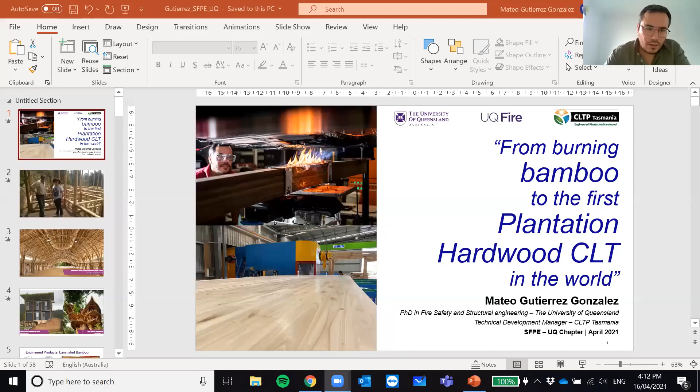Thanks, Julian, and good afternoon everyone. I'm very pleased to be here this afternoon. It's a pleasure to give a talk in the SFPE UQ chapter. Not very far ago, I was sitting on the other side, looking at other alumni and practitioners in our field. It's a great opportunity, and I'm very happy to be here today. I'm going to start sharing my screen, and we can start with the presentation. Can you see the screen, Julian? Yeah, that's perfect, you're good to go.

The title of my presentation is 'From Burning Bamboo to the First Commercial Plantation Hardwood CLT in the World.' As you can infer from the title, I will divide my presentation into two main parts. The first will focus on the latest outcomes of my PhD, which was on the fire performance of bamboo structures. In the second part, I'll give you a glimpse of the work I'm currently doing at CLTP Tasmania, where we are developing a sustainable approach for processing plantation hardwood into engineered wood products, mainly glulam and CLT.

Let's get started. This journey began in 2010 when I started my master's in structural engineering in Colombia. I decided I didn't want to study conventional materials like concrete and steel. I wanted to focus on alternative, more sustainable materials. So I started studying bamboo, and back in 2015 I decided I wanted to do my PhD, and I really wanted to do it in bamboo, after doing research and practicing in designing bamboo houses.

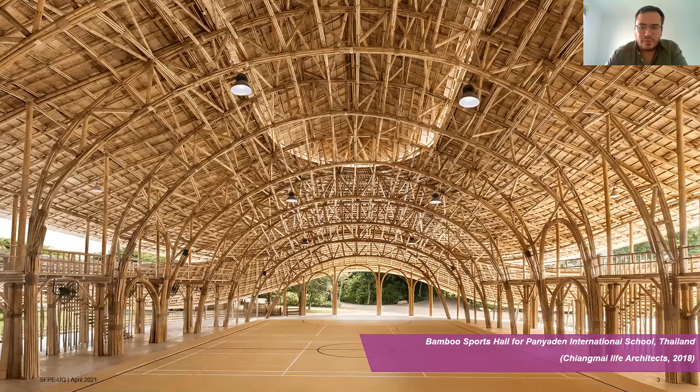For many of you, bamboo is not a familiar construction material. It's not very used in Australia, but it's a very common material around the world — more than 1 billion people live in bamboo houses. Bamboo is mainly used in low-rise construction, like residential dwellings or community centers, or like this sports hall located in Thailand.

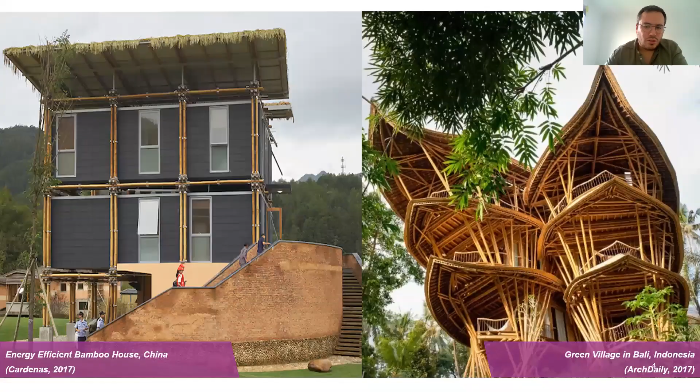But bamboo can also be used in multi-story houses, like 3 or 4 story buildings. You see a couple of examples here — this is a house in China. On the left-hand side you see a house in China, and on the right-hand side a hotel in Bali, showing the application of round bamboo.

We don't only use round bamboo as a construction material; similar to timber, bamboo has also evolved into engineered products. The most common engineered bamboo product is laminated bamboo, made of bamboo strips. You have round bamboo that is split, and the strips obtained from the bamboo culm are planed, glued, and pressed together to create larger cross sections. This is a laminated bamboo beam made out of Phyllostachys pubescens, the most common bamboo species in China and the most common species used for manufacturing engineered bamboo products.

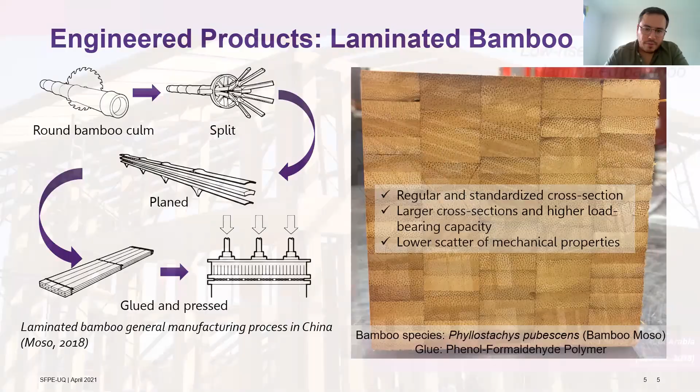With engineered bamboo, you can move from irregular circular cross sections, like those in round bamboo, to regular, standardized rectangular cross sections that can be larger — and because they're larger, they can withstand higher loads. As with any other engineered product, you reduce the variation in mechanical properties, resulting in more reliable and stronger load-bearing elements. There are applications for laminated bamboo similar to those seen in mass timber construction or light timber framing.

When I started my PhD and moved to UQ, our fire safety engineering group focused on the fire performance of materials and understanding fire performance in the built environment. So we decided to conduct research on the fire performance of bamboo. Of course, bamboo, like any other combustible material, faces the same issues when subjected to fire - it burns and loses integrity, which can lead to the collapse of bamboo structures.

On the left-hand side, this is a house in Mexico. They were welding some steel connections, and that led to a fire. Here's another structure in Bali - this was one of the main engineered bamboo manufacturers in Bali. You can see this concrete column, and this is what was left after the fire.

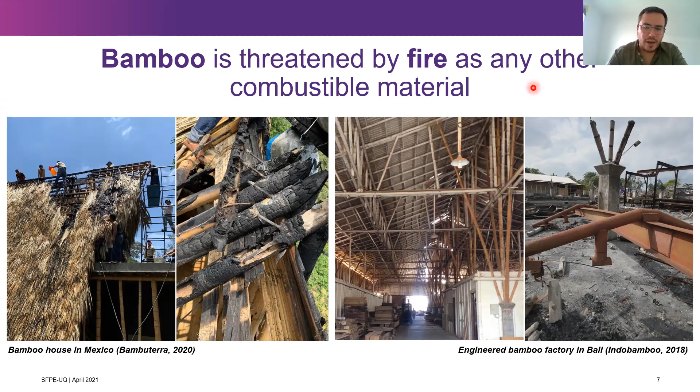Round bamboo, because of its geometry and mechanical properties, can lose its strength very quickly, which can lead to structural collapse.

This is another sad example - the biggest engineered bamboo supplier in Europe. This is the factory of MOSO International in the Netherlands. As you can see in the picture below, the adjacent building where they used to store all the engineered bamboo products got burned and collapsed after burnout.

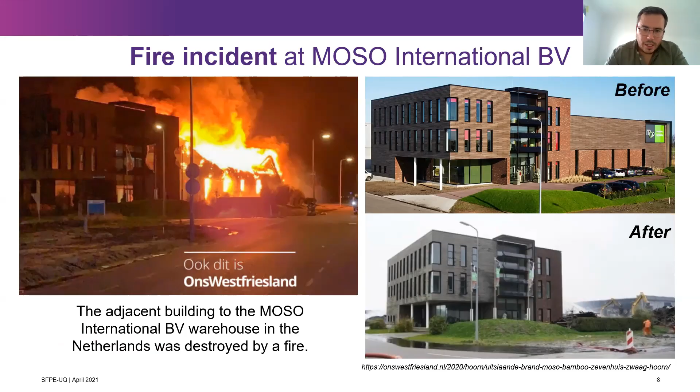We found there was very little understanding of how bamboo behaves during a fire. Obviously, because more than a billion people live in bamboo houses, bamboo is already being used, so there's already a hazard if we don't know how to design bamboo to withstand fire. There's also potential for using bamboo in mid-rise or even high-rise construction.

Future applications for laminated bamboo can be used in mid-rise and high-rise constructions where fire could be a significant problem. So we believed we needed a methodology to facilitate performance-based design solutions with bamboo, and we wanted the same confidence we have in other conventional materials. To do that, we require a better understanding of the structural fire performance of bamboo.

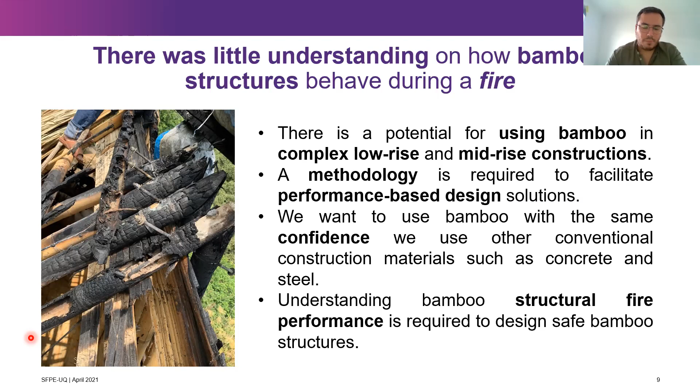The methodology we propose can be divided into three main stages. The first part focused on understanding the mechanical properties at elevated temperature - compressive strength, tensile strength, and modulus of elasticity for both types of loads. We looked at failure modes and tried to create stress-strain constitutive models at elevated temperature.

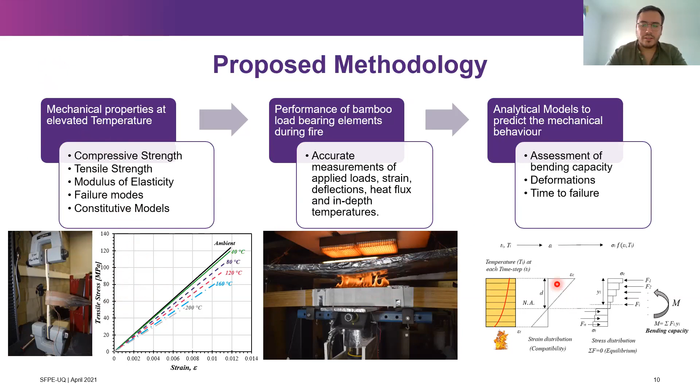With the information at the material level, we moved to a bigger scale to predict and understand the performance of load-bearing elements - mainly columns, short columns, and bamboo beams. I'll show results today about the beams. Finally, we wanted to create analytical models to predict the performance of those members - using the mechanical properties, their variation, the constitutive models, and experimental test results at a bigger scale, to see if the models could predict that behavior.

So we started testing laminated bamboo in compression. We did the first tests in round bamboo, but quickly realized round bamboo loses strength very quickly. Since during fire conditions we definitely wanted bigger cross sections, we decided to put more attention into engineered bamboo products.

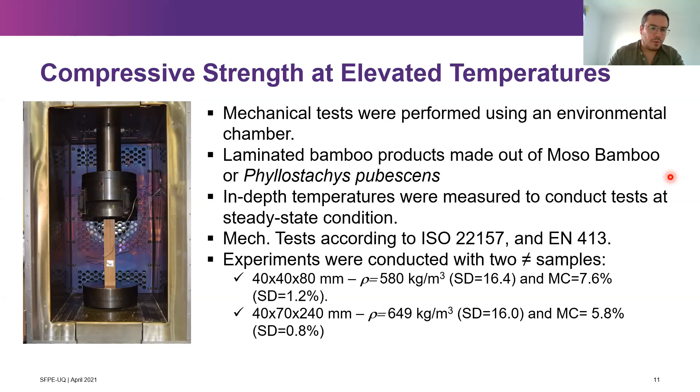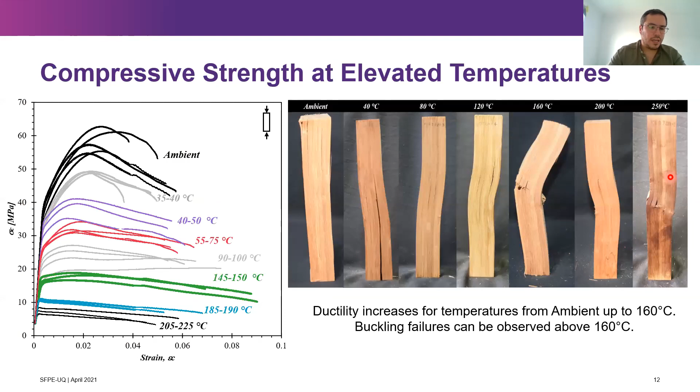We exposed laminated bamboo specimens in an environmental chamber where we could carefully control the temperature. We established correlations between surface temperature and internal temperature of our specimens, and we were able to understand the reduction in compressive strength. We also measured the reduction in modulus of elasticity and tried to recreate the stress-strain behavior of bamboo under compression.

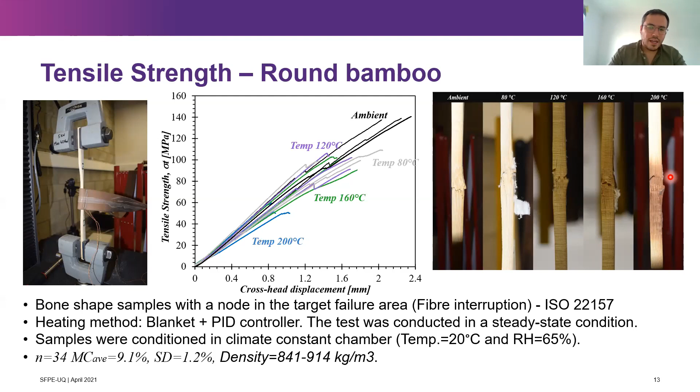We repeated the same process with tensile strength, conducting several tests at different temperatures, from ambient temperature around 20-25 degrees up to 200-250 degrees. Again, we measured the reduction in modulus of elasticity and the reduction in tensile strength.

We performed dynamic mechanical analysis, DMA, on small-scale samples, and compared the results of the dynamic mechanical analysis against the results at the bench scale. What you can see here is the reduction - the normalized modulus of elasticity against temperature.

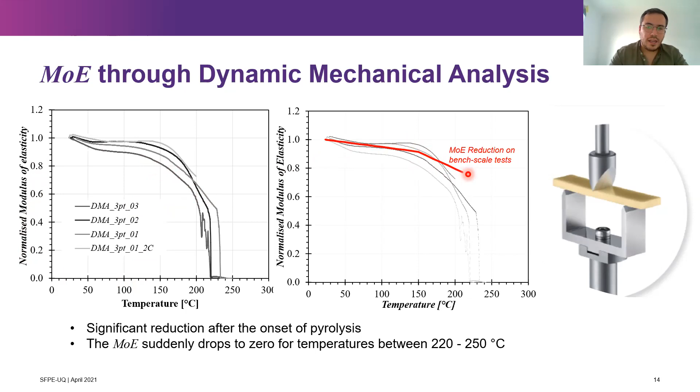And these are the results of the DMA, and this is the reduction in the MOE at bench scale, which told us that the results match pretty well, both medium and small scale.

With all that information, we created some reduction factors for bamboo at elevated temperature. Reduction factors for the compressive strength, which is the black line here, reduction factor for the tensile strength, which is this line, and then the reduction in the modulus of elasticity.

What you can see here is that, for example, at 100 degrees, bamboo loses almost 70% of the compressive strength, and that's a significant reduction. If we think that the temperature during a fire is around 1200 degrees Celsius, this is telling us that we very quickly start losing the capacity of load-bearing bamboo members.

So the reduction in tension is not that critical, and a reduction in the modulus of elasticity again is not that critical. But after 150 degrees, where we observe the onset of pyrolysis, the reduction is way more considerable. Then after 250, the material is completely charred, and the strength and stiffness of bamboo can be neglected.

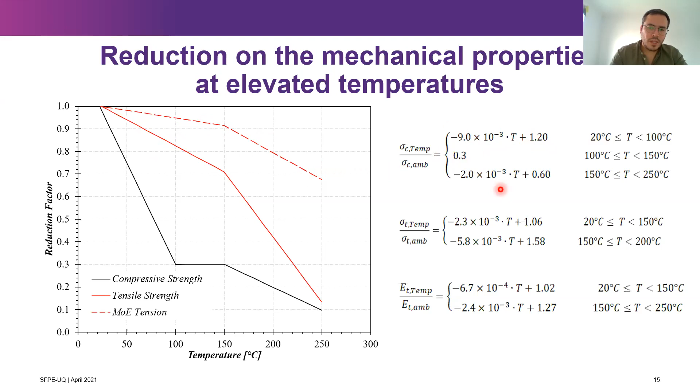We describe that reduction with these equations, and based on that reduction and our stress strain models, we propose stress strain models for compression and a stress strain model for tension. Tension is a little bit easier because bamboo is pretty much elastic in tension, and it has a brittle failure.

Compression is a little bit more complicated because you see a lot of plasticity. You can use very complicated models, but we ended up going for a simplistic approach to see if that simplistic approach could give us an accurate result. So we proposed to use a perfect elastoplastic model that was changing as a function of temperature.

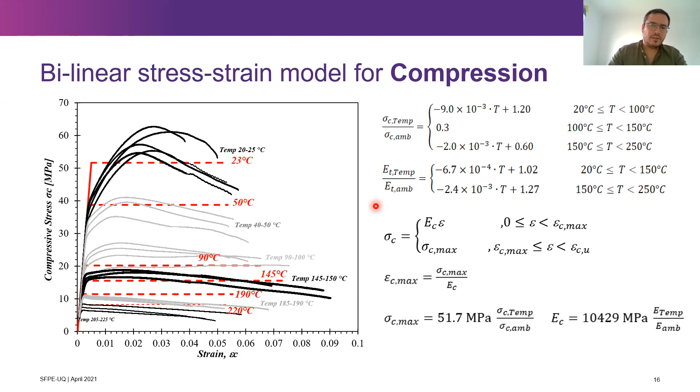Again, we describe the performance of bamboo with different equations, which were a function of temperature. Then with these constitutive stress strain models, we moved to the next stage, which was the analysis of bending specimens exposed to fire.

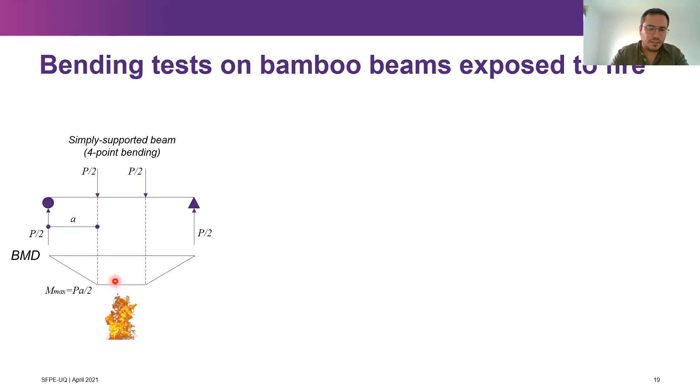In order to test those elements, we decided to go for the simplest scenario, a simply supported beam loaded in 4-point bending. You obviously have the maximum bending moment in the central third of the beam, and we expose that part to fire. But conducting fire experiments is not an easy task.

We couldn't carry out those experiments at the structural lab because of the release of smoke and because of the elevated temperatures during the test. We were also creating some risk for the equipment.

So we designed our own testing setup, and that was one of the biggest tasks of my PhD, designing this setup. Basically, what we did is we turned this upside down — instead of applying the loads downwards, we applied the loads upwards.

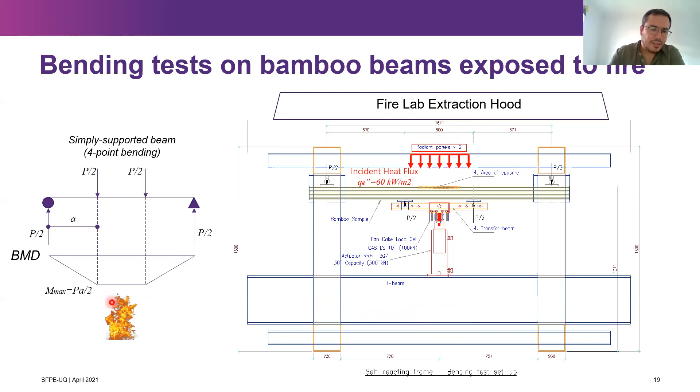So supports are here, you have your specimen here, and then we have an actuator. The actuator was using a transfer beam, and these were our loading points. In order to apply the fire, we have our extraction hood here, and we have radiant panels providing a constant heat flux. We start burning the central third of the beam, where we have the maximum bending moments.

Before applying the test, you can see the setup here. This is a video of a test at ambient temperature, so without any fire, until basically reaching the failure stage. You can see the actuator going up, and you see the loading points.

We use DIC, digital image correlation system, to be able to track the displacements and the strain, but we also use contact sensors — string pots and strain gauges. Again, this is a test at ambient temperature, the same test you usually do when applying the load downwards, but we wanted to do it this way because we needed to apply the external heat flux.

So what you see here is a radiant panel. These gypsum boards were protecting the other part of the beam that we didn't want to expose to fire.

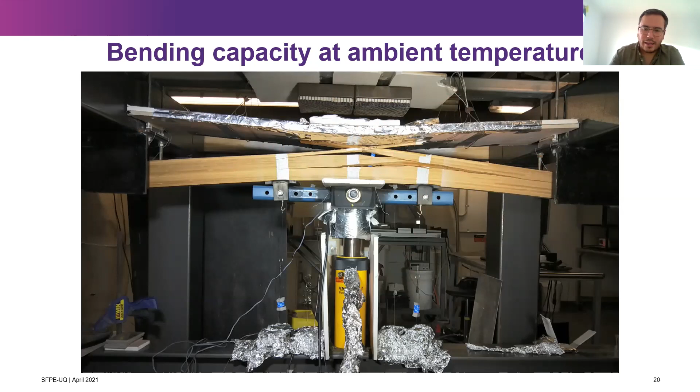And again, from the results of this test at ambient temperature, we basically obtained our failure loads in bending under that particular configuration, and we understood the force deflection curves.

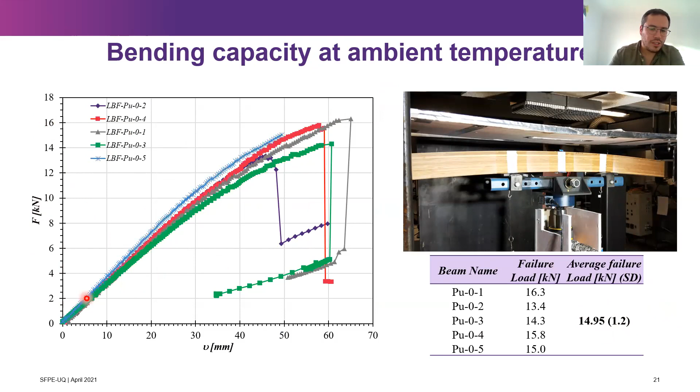With that information, we defined three different stress levels: we apply 54% of the failure load, 40% of the failure load, and 27% of the failure load. Remember that from the previous test, we defined our failure load, which was around 15 kilonewton.

So 8 kilonewton, 6 kilonewton, and 4 kilonewton allow us to test 54, 40, and 27% of the failure load. Obviously, we expose those beams to the same external heat flux, which was 60 kilowatts per square meter.

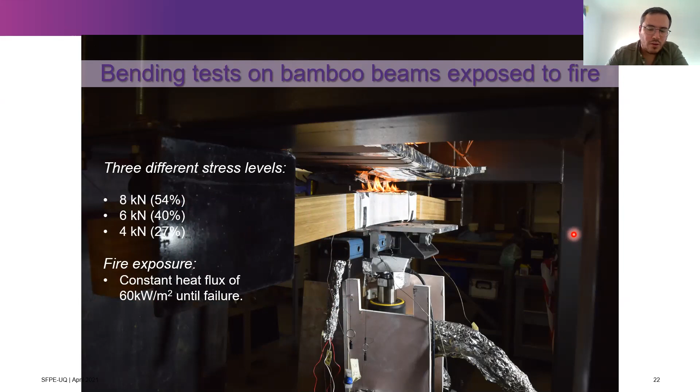What we basically did is apply the load until we reach this stress level, and at that point we apply our constant heat flux. We measure the distance between the radiant panels and the beam before starting the test, and that's what defines the heat flux. We ran several calibrations with a heat flux meter, and we were quite confident that we were exposing our beam to a constant heat. So here you will see a typical test.

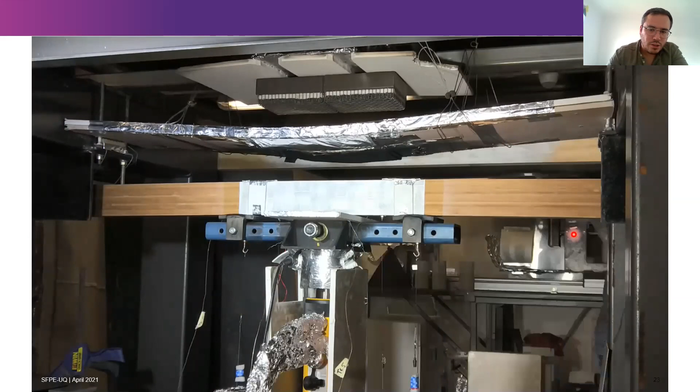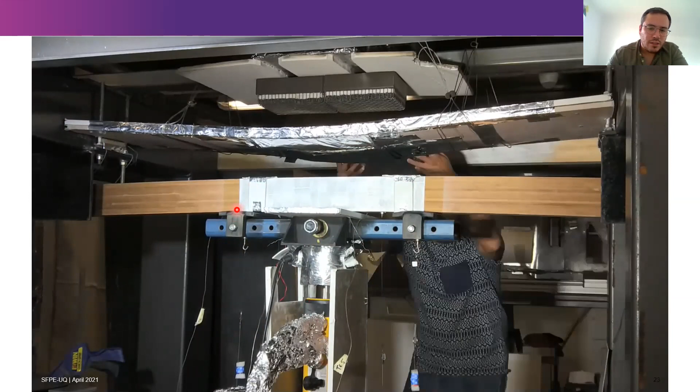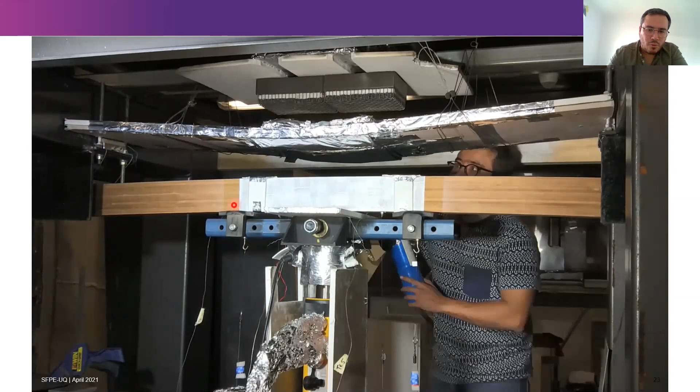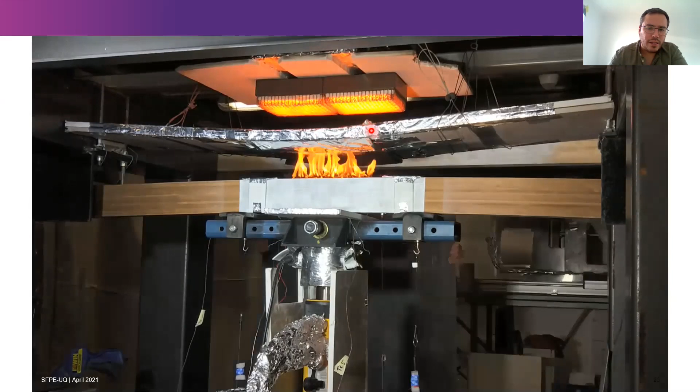So you see that the actuator is going up. We are applying the load until we reach the desired stress level. Imagine that this is, let's say, 6 kilonewton force. Once we reach that desired stress level, we turn on the radiant panels. We wait until the radiant panels reach a steady state condition, so the heat flux was uniform, and after that point we ignited the sample. Once the sample ignites and you start burning the specimen, the specimen starts getting more stress and starts having more and more deformation until it finally reached the failure.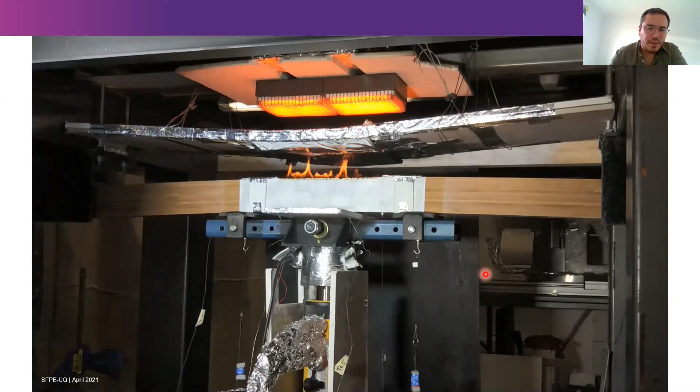We also used an electronic pressure valve that was controlling the pressure in the actuator and giving us feedback. So in order to maintain the desired stress level, we were always changing the pressure in the actuator to keep it constant. Because we had constant pressure and temperature penetration, and we were burning the sample, finally the sample ended up reaching failure at some point.

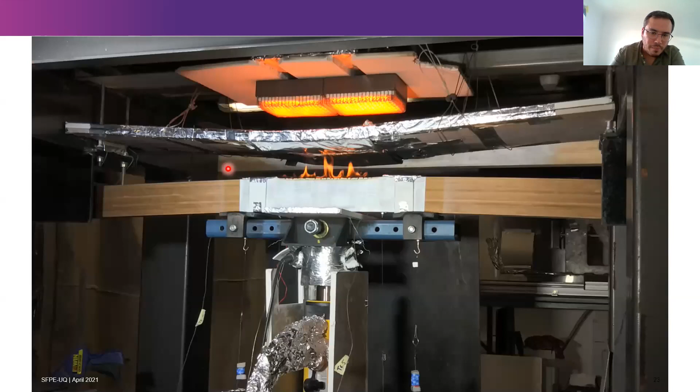One of the more innovative approaches in this test setup was the use of DIC in a fire application. So what you will see here is a zoom in of this area, of the middle third of the beam. Again, here you see the actuator, the load cell, our transfer beam, and this is the central third of the beam.

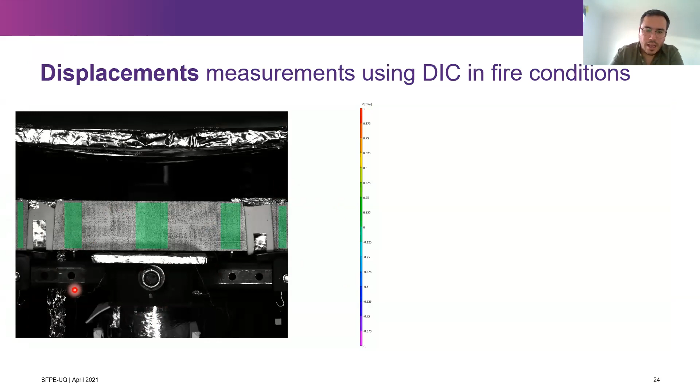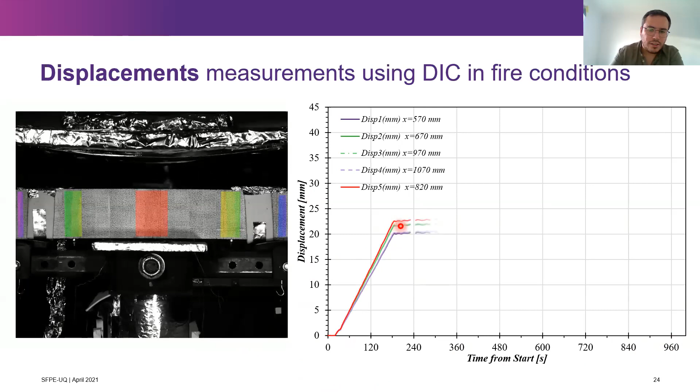And again, here you have displacement against time. We start loading the beam until we reach the desired stress level, and then at that point we start the fire exposure. You see that the beam starts increasing the displacement until it finally reached failure.

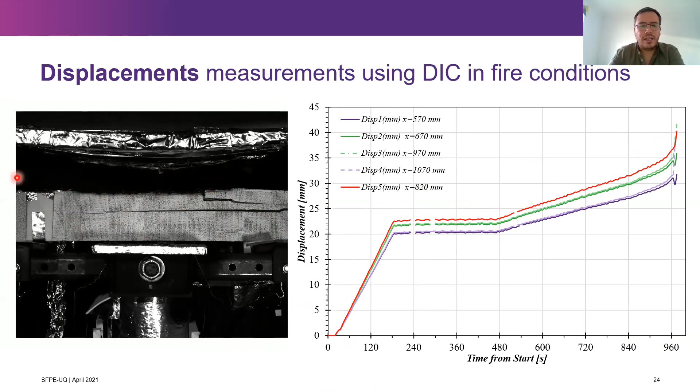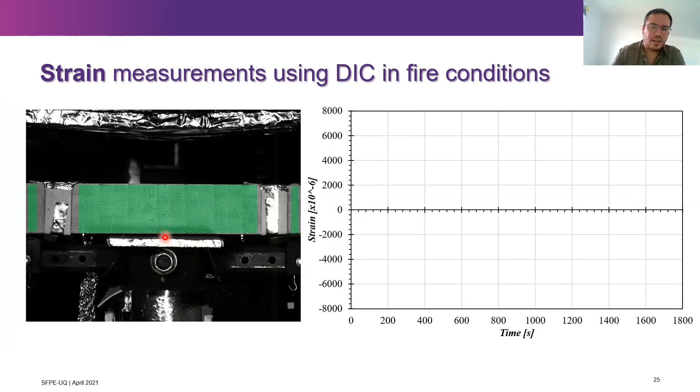The DIC not only allows us to capture the deflections, but it also allows us to capture the stress and strain in the beam. So what you will see here is strain against time. You will have tensions here, compressions here, and you will see the strain at 3 points: at the bottom of the beam, the furthermost fiber, bottom fiber in compression in this case, because remember we are loading upwards. So you're going to have the opposite of what you normally have in a conventional test setup - compression at the bottom and tension at the top.

You start loading the beam, you have compressions here, tensions here - tension, compression, and the neutral axis where the strain is pretty much zero. Then you start burning the beam. Once you start burning the beam, you have more strain, because you start increasing the stresses, until you finally reach failure.

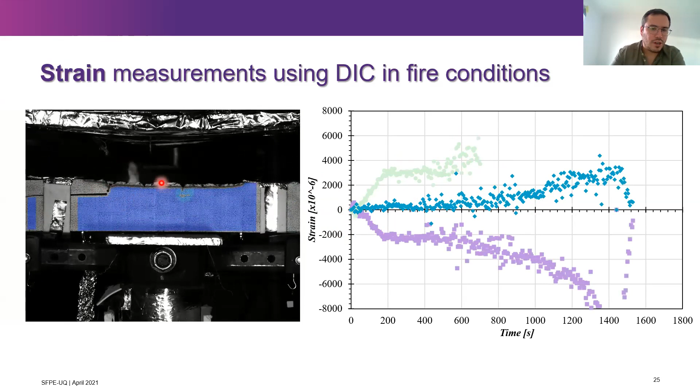What was really nice and really cool about this system is that you can see the fire propagation and you can kind of anticipate where the failure is going to occur, because you can see which parts of the beams are subjected to higher strain and of course higher stresses.

In order to measure the temperature profiles and the in-depth temperatures in our specimens, we performed some control tests with in-depth thermocouples. We didn't want to affect our specimens during the fire structural experiments, so we performed some tests with the same situations as in our structural test, to measure the temperature distribution in the beam.

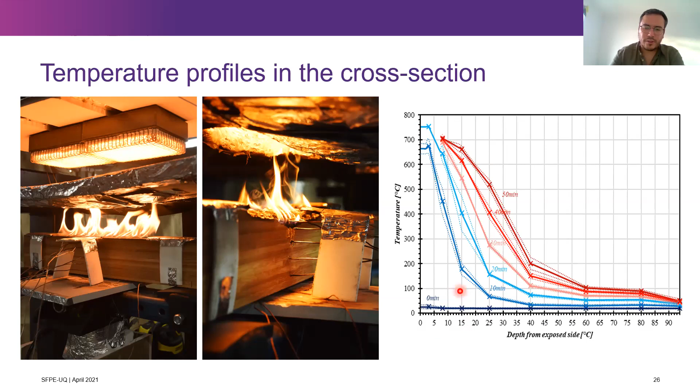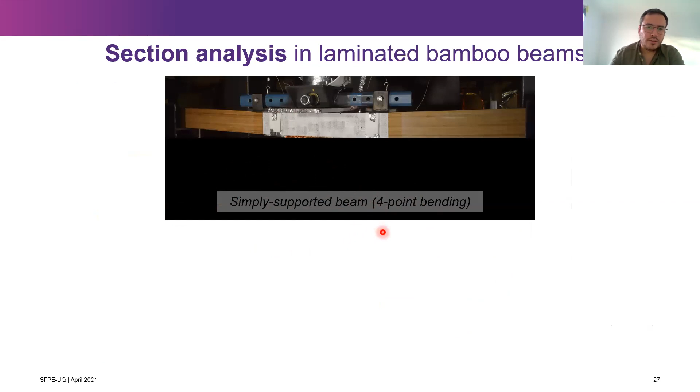So that was pretty much the setup and the results of the experimental test. Then we move into the numerical model. It was a very simple numerical model.

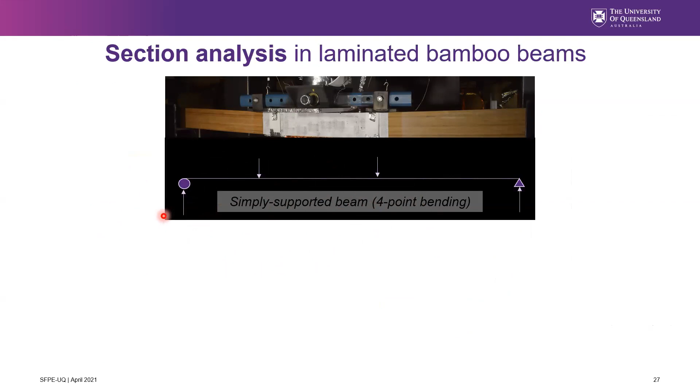You can use the same kind of analysis that you do at ambient temperature. We decided to use a section analysis. So basically we had our beam, and we divided that beam into different slices. We know the properties of each slice, and obviously if we apply fundamental equations, we can predict the bending moment capacity.

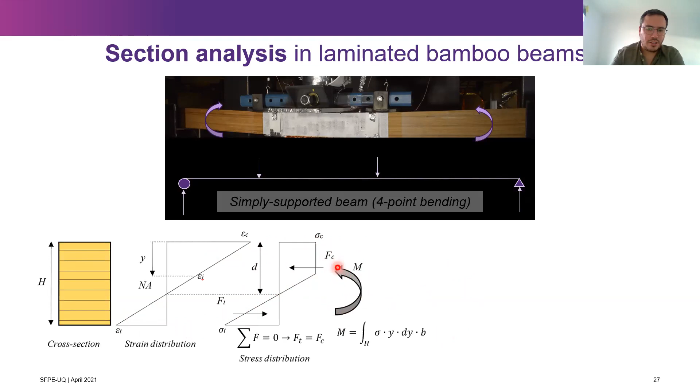The good thing here is that you can use stress strain models, so you can predict the plastic zone. As we know in timber and in bamboo, when we have tensile failures, we usually reach yielding in compression, and we can have better prediction for the bending capacity. The difference here is that...

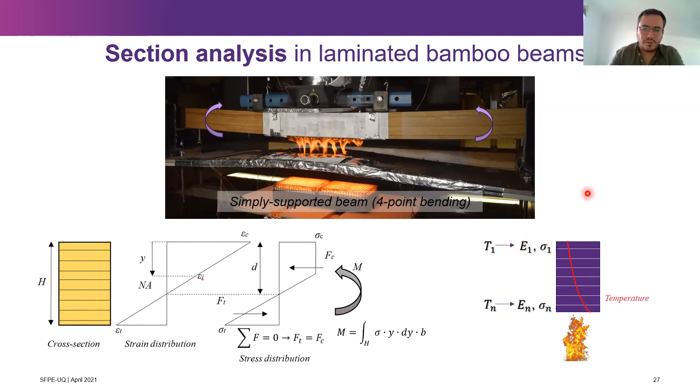Once we expose this beam to fire, the properties of our cross section are not constant anymore, because we're going to have a temperature distribution. So each fiber in our cross section is going to have a different mechanical property, because this is what we found in the first part of the PhD - that the mechanical properties were changing as a function of that internal temperature.

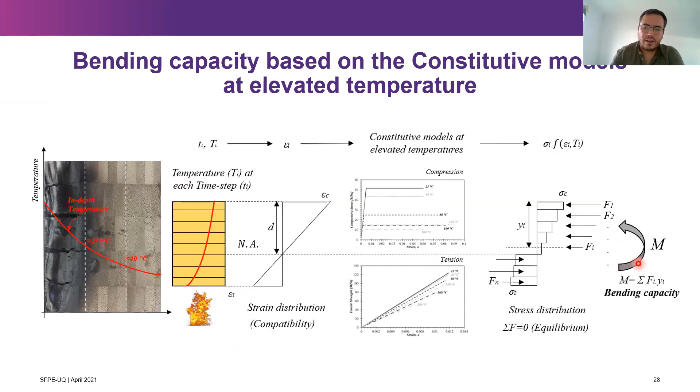So what we proposed was to use the same section analysis, but change the mechanical properties of each fiber. You can divide that cross section into as many layers as you want. You assign stress strain models for each of the fibers, and then apply structural equations, like equilibrium equations, to obtain the bending capacity.

But you not only predict the capacity, you can also predict the stress strain profiles. The continuous lines are the experimental results. These are the results for the 4 kilonewton test, and the red dashed line is the prediction of our model.

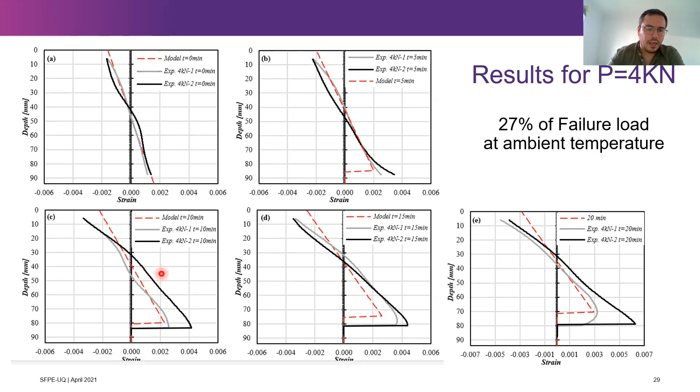The model assumes that after 250 degrees you lose all the strength - that's pretty much what's showing the progression of the char depth. You can see that the results of our model match pretty well the experimental results of the test.

We also compared the experimental results in the bending capacity, or what many people understand as the fire resistance. For 8 kilonewton, the time to failure was around 8 minutes. For 6 kilonewton, the time to failure was around 16.5 minutes. And for 4 kilonewton, the time to failure was around 22 minutes.

With our model, we predicted that reduction in the load bearing capacity. We observed that the variation between the experimental results and the numerical model was around 11% difference.

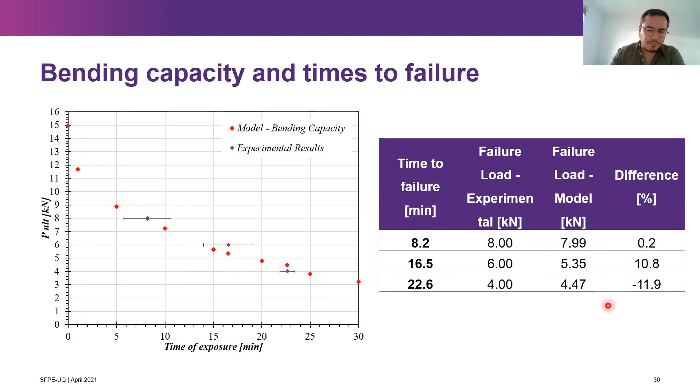But after we're getting very close to failure, there's more difference between our model and experimental results. But again, the concept was very simple: you had a part of your beam that was changing properties because of the effect of temperature. We managed to predict the reduction in the stiffness, and with that reduction in stiffness, we were able to calculate the deflections.

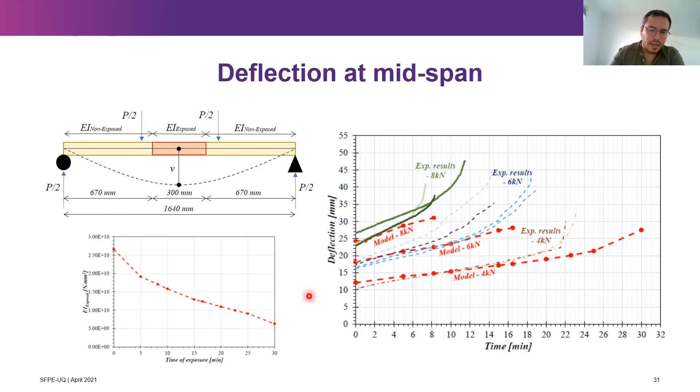This is because of the influence of the heated depth. We observe that bamboo has a significant reduction in strength at very low temperatures - you still have a significant reduction below 100 degrees. This is for tension - remember that this is the side that is exposed.

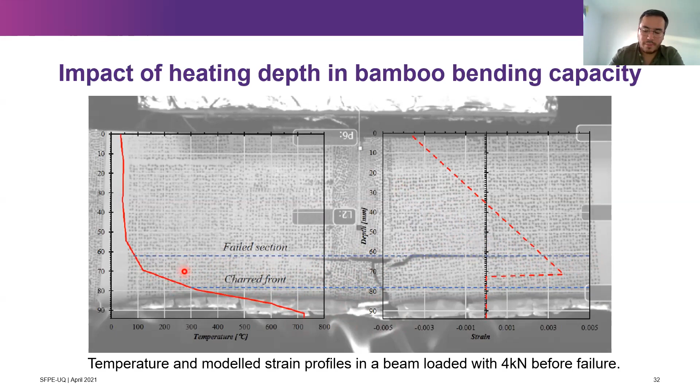What I'm trying to say here is that the conventional approach of the reduced cross-section method could not be very accurate to describe the performance of bamboo, because of the thermal properties and because of the reduction in the mechanical properties. So again, we also compare the results of the reduced cross-section method.

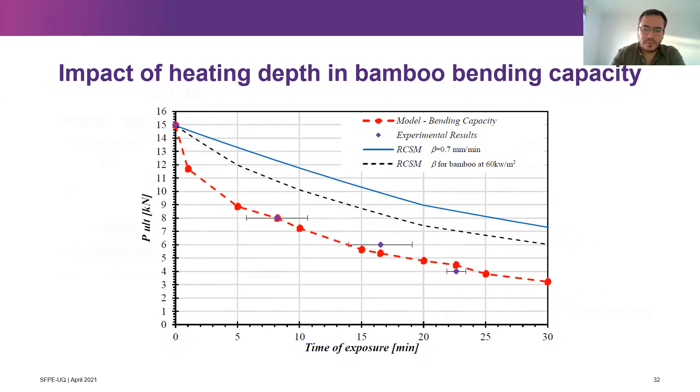We also tried to apply the reduced cross-section method, but instead of using a conventional charring rate, we used the results of our experimental test for 60 kilowatts per square meter. And even though we had very accurate charring rates, up to 1.3 millimeters per minute, you still over-predict the fire resistance of bamboo. So our model is way closer to reality, and this allows us to get much better results.

In conclusion, this study developed novel experimental setups for testing load-bearing or charring load-bearing members under fire exposure, and the use of DIC was very beneficial to understand the performance of those materials. We obtained a reduction in compressive strength, tensile strength, and modulus of elasticity for bamboo at elevated temperature, and we managed to create equations for these properties as a function of temperature.

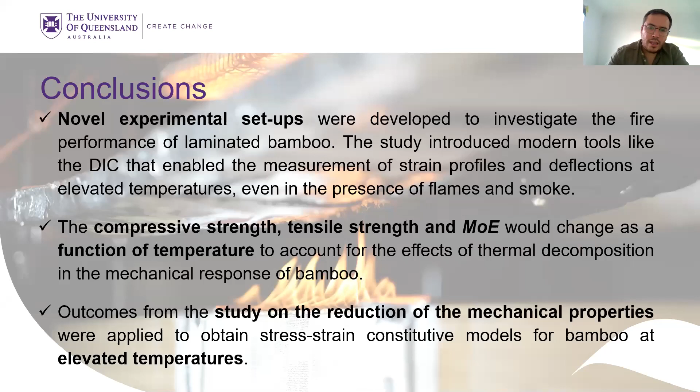We propose different constitutive stress-strain models to predict the performance of bamboo at elevated temperature, and we obtain stress-strain profiles, bending capacity, and deflections as a combination of heat transfer models and thermomechanical models through the use of constitutive stress-strain models.

For the heat transfer models, we just used experimental results measuring the in-depth temperatures, but as many of you know, some other PhD students are working on numerical heat transfer models, which in the future will help us predict those in-depth temperatures.

We used a quite simplistic analysis for developing those stress-strain models. You can use more complex analyses like tri-linear models or even polynomial models, but this approach was enough to get very close to the results.

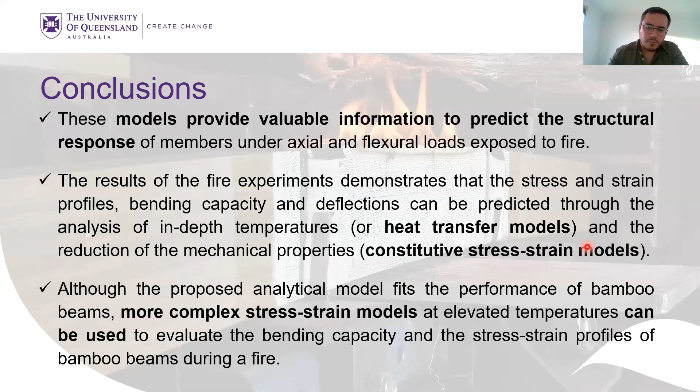In the second part, I'll talk about product development at CLTP, and I'll go through this quickly because we're running out of time. The transition from doing the PhD into going to industry was quite interesting for me, and it's something many of you will face very soon.

For those who are not familiar with CLT production, CLT is an engineered wood product. At CLTP Tasmania we are using a timber resource that has never been used for the production of engineered wood products. The species we use is Eucalyptus nitens, a timber species normally used for paper production, for wood pulp or wood chips. That was quite interesting for me and for the industry itself.

You have logs, you cut those logs, dry them, do some grading before you finger join them. Then you plane those lamellas, apply glue, make glue laminated timber by putting all the lamellas in the same direction. If you're doing cross laminated timber, you cross layers next to each other to make panels. Once you have your panels, you cut them normally in CNCs, package those panels, and then bring them to the construction site.

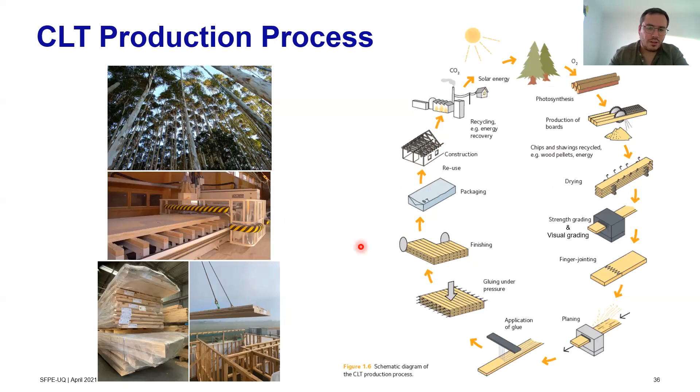Here you have your eucalyptus plantations. Then you take them to the factory, dry them, put it into the CLT vacuum press or mechanical press if you're using that, and then cut the panels and send them to the construction site.

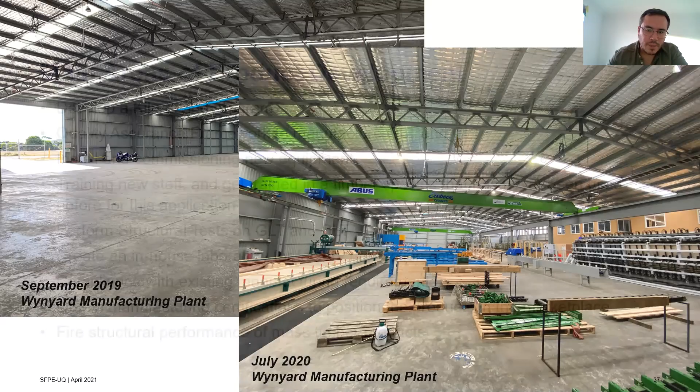This was the state of the factory in September 2019, before when I was finishing my PhD. And this was the factory in July 2020, almost a year ago. So you see there was a very quick transition, a very quick evolution of this company, and I was involved in all of that as a technical development manager right after finishing my PhD.

Some of the main areas of work were to develop a kiln drying program for this species, creating a quality assurance framework to manufacture GLT and CLT, installing and commissioning a lot of new equipment, as you saw from the previous picture. And that was only the manufacturing plant—we have another facility where we dry the timber and do the grading.

A lot of training has been involved, training our staff and myself as well, supervising and coordinating the operation of this facility. We have done a lot of testing to understand the properties of those products. I created an in-house laboratory for factory production control, and we have worked on obtaining different types of certifications to position the product in the market.

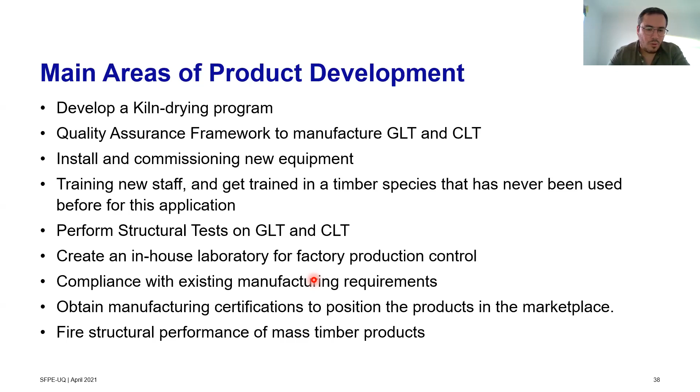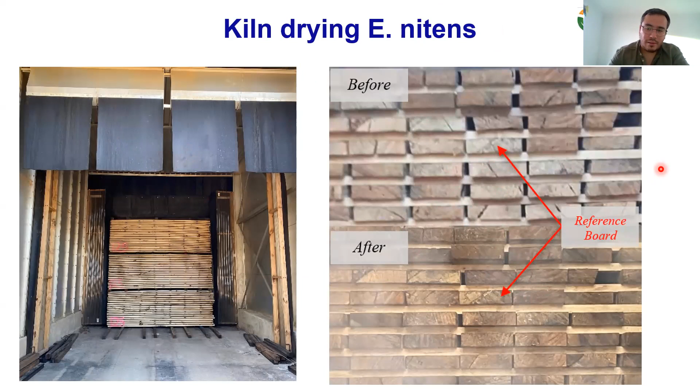And what could be very interesting for some of you, we have also done some work in the fire performance of these products. Kiln drying was a massive challenge for us. You see here timber in the kilns, and some of the changes the timber goes through in this process. That's been a massive amount of work dedicated to that area.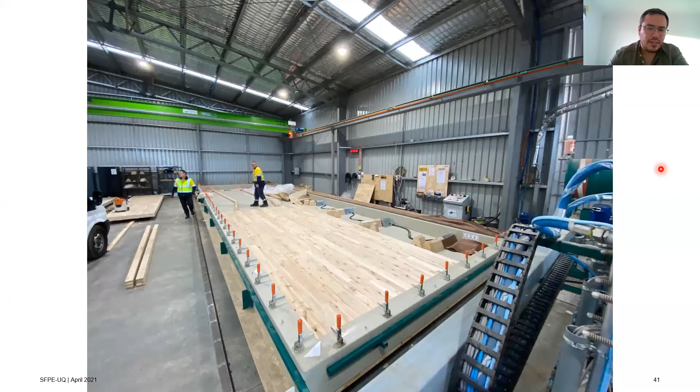Finger jointing of lamellas to be able to put it in the vacuum press and produce CLT. Again, we created a quality assurance framework. We had to control many different variables during production, like glue rates, pressure, temperature, and we need to be aware of the climate conditions when we produce these products.

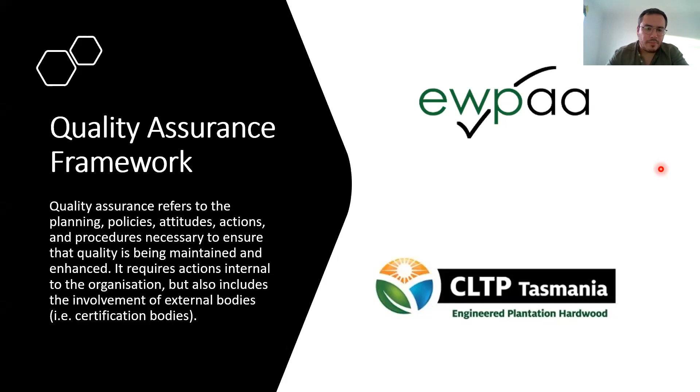Many things we have to control. We need to comply with existing standards, the Australian standard for production of finger jointed lamellas and glue laminated timber. There is no Australian standard for the production of CLT, so we use ISO standards and European standards as a reference.

A lot of training is involved, and as a technical manager, I've been involved in a lot of that, creating training material and performing training.

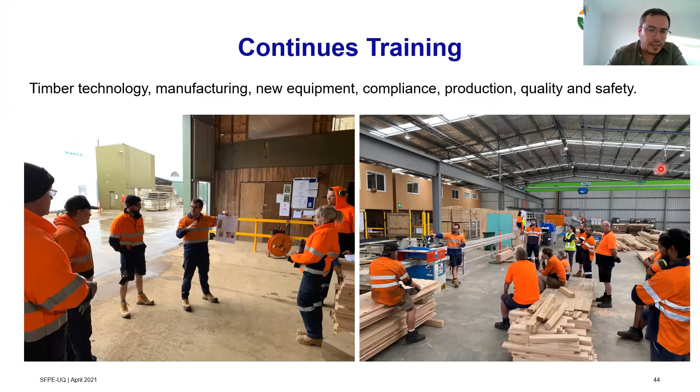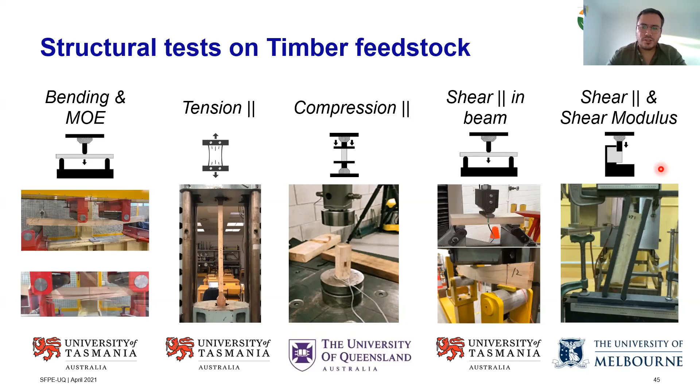We have done a lot of tests, at the feedstock level, characterizing the material that we are going to be using in those products. Of course, all types of structural tests, from bending, compression, tension, shear, parallel shear, perpendicular shear, to testing the system itself, like testing the engineered products.

In this case, a lot of testing in the CLT, as you can see here, but we have done a lot of testing in GLT as well. Bending, rolling shear, compression, and pure rolling shear, as you see in this picture.

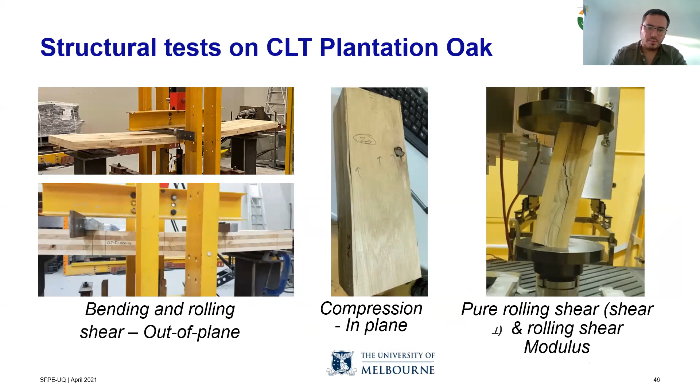That's the lab where we are doing factory production control. We have to test daily our finger jointed lamellas. We need to test our feedstock to control the material that we put in our products. We do a lot of testing in our glue lines to control the bond quality of these products.

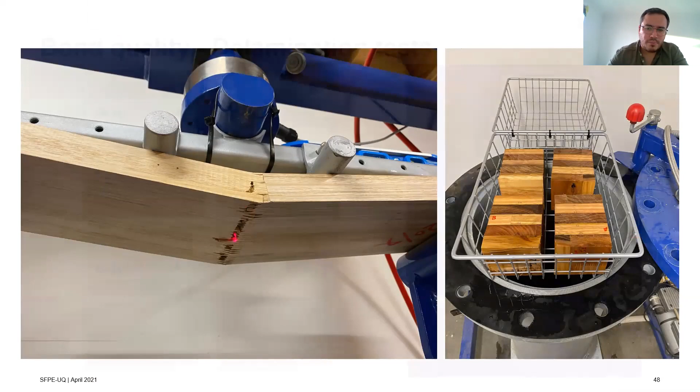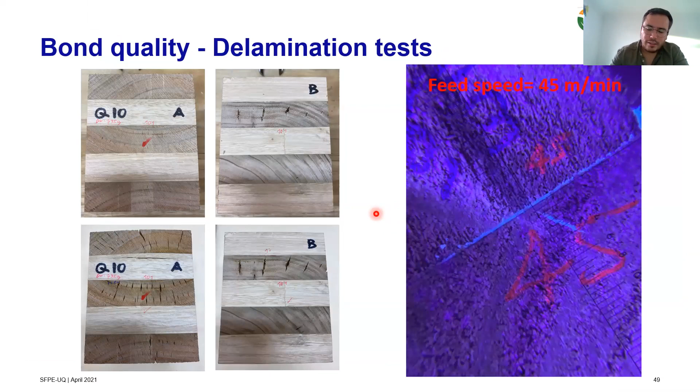We look at the delamination, we look at the thickness of the glue line. When you expose glue line to UV lights, you can measure the thickness. And we work with the certifiers that control our process and certify that we are complying with these manufacturing standards.

So different processes like EWPAA, but we also have Australian Made certification that we produce all our material here in Australia, and FSC and PEFC to prove that we are using a sustainable approach and sustainable plantations.

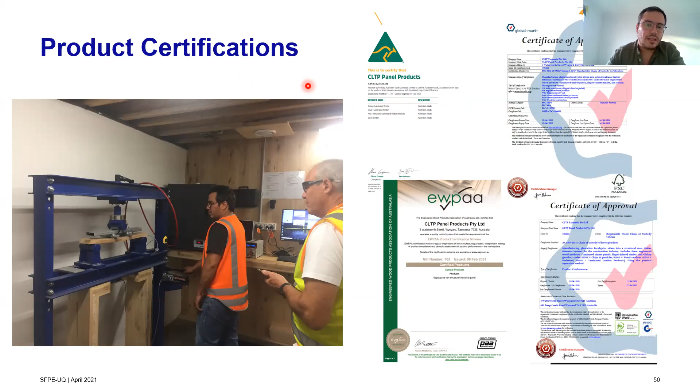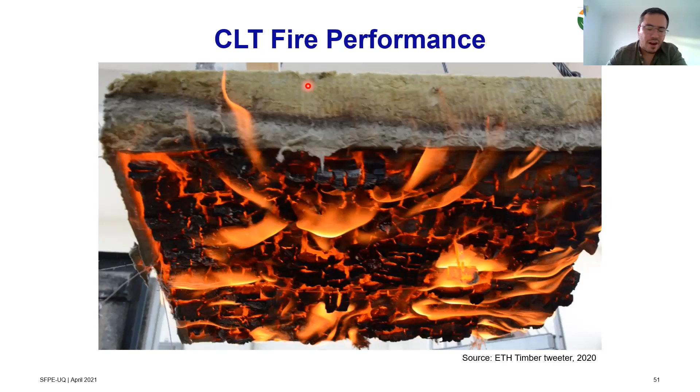And some work has been done in fire as well. We are currently defining our fire testing program. But as many of you know, the fire resistance of CLT depends on many different things, like the geometry, the thickness of the lamellas, the properties of our feedstock, the loss or reduction in strength and stiffness, as I explained before in bamboo, the use of different insulation materials, and the use of joints and connections. So it is a complex program, and I'm working on that.

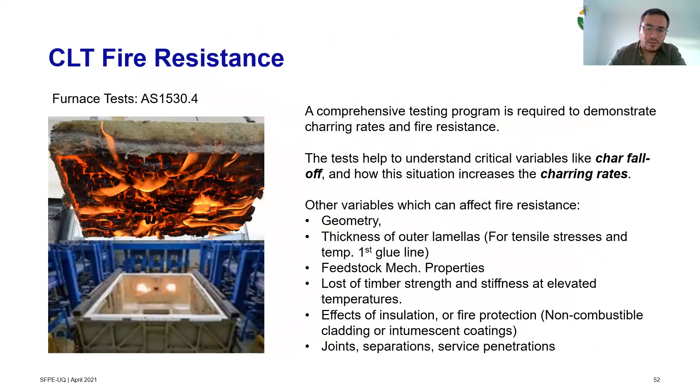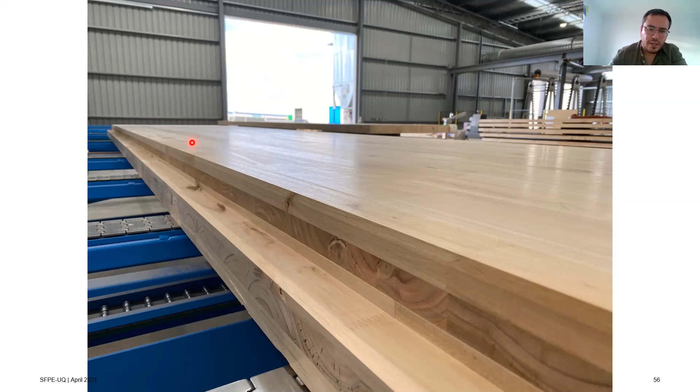At the end, we're very happy with the results. After this year, we have already produced some very beautiful products. This is some CLT panels from our first commercial project. You see the finish and the appearance of the panel, which made us feel very proud because this is a timber species that no one ever thought we could use in this type of application. With all the work that we have done in the last year, we are making this option a reality.

So in conclusion, yes, your technical skills are very important, and after finishing a PhD, they are very important because they give you a lot of confidence. But as a technical development manager, I have also seen that soft skills are equally important. You need to have a lot of communication to be able to transfer your knowledge and your ideas. You need to have a lot of creativity.

There is a lot of problem solving in our roles as technical experts, so you should have a lot of empathy. You need to have adaptability because industry moves pretty quickly. After doing a PhD and being focused on the same research topic for more than 3 years, the change into going to industry could be challenging.

And of course, you're always in a continuous learning process. Having a PhD, or just finishing one, just means that you are able to learn quicker, or able to find answers in the right place, but you're always going to be learning. So that's pretty much my takeaways, and I hope you have enjoyed this presentation, and I'm happy to take questions if we still have some time. Thank you.

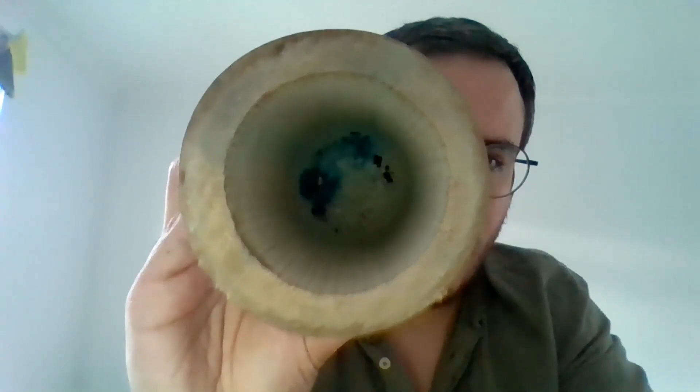Laminated bamboo will definitely depend on the type of bamboo or bamboo species you are using. Because of the very thin cross section, I actually have a piece of bamboo here. Remember that you are trying to have rectangular cross sections out of a circular cross section. Bamboos used for laminated bamboo are normally called woody bamboos, and they have a diameter of around 120 to 160 mil, with wall thickness around 10 to 15 mil. So those strips are usually 4 to 5 mil by 20 mil, because you also need a minimum length. The length of those strips is usually 2.4 meters or 3 meters. And bamboo is a tapered material as well, so you're kind of restrained by the geometry of bamboo.

Okay, depends on a lot of factors, as you were explaining. And finally, there is one question related to the density of the timber and the trees, and I guess this one is related more to the ones you're using in your current job, since that question was asked during that section.